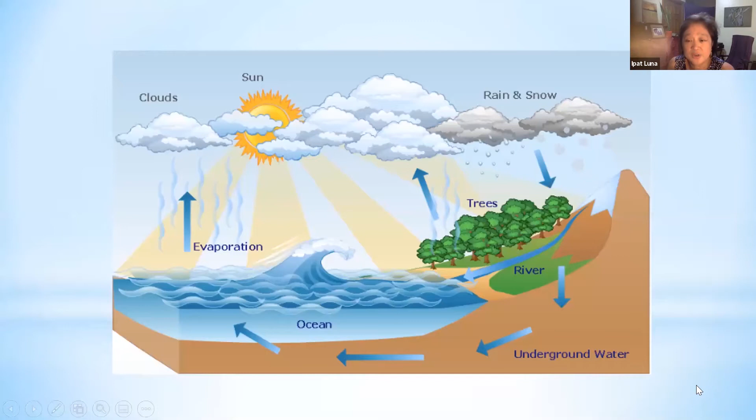I'd like to end by saying that we need to determine who will really fund the infrastructure, because right now we are at a stage where the concessionaires in Metro Manila have their contracts being reviewed, and they haven't heard yet whether their extension will be valid until 2037.

The Supreme Court decisions in the Philippines are clear that this is the concession's responsibility. The Clean Water Act, though, says it's the national government's regular budget, but there's a huge difference as to when this money is spent by whichever party spends it. The longer the delay, the higher the cost, the higher the damage, and the higher the rehabilitation cost as well. It needs to be determined that if the government will be spending it, it needs to be in a specific department. Right now, I haven't met anybody in the DPWH who supports putting this in their budget.

So I think the only way to make all of this water used by Metro Manila and the highly urbanized cities usable again and bring it back to the water cycle is for treatment to happen and for there to be a realization of the value of that water if we make it a resource — the value of treated wastewater. I guess that's it. Thank you very much.

Thank you, Sir Onkoy, for the kind introduction. I'm so happy to be here today to discuss methods for a circular economy, a cause I have been dedicated to for the past 10 years through my invention of BioPipe no-sludge technology. Today I'll be talking about the water supply and sanitation situation in the Philippines, and the BioPipe technology and its application at the Narköy Ecological Hotel in Turkey, where the water is being reused to supply an organic farm.

The Philippines is currently facing a critical point with regards to both the future of the sanitation sector and the levels of groundwater available. Currently, only about 10% of the sewage nationwide is being treated, with the rest being discharged directly to the sea or contaminating underground water supplies through leaking septic tanks or through the dumping of improperly treated sludge. Additionally, because groundwater has become the single greatest source of water supply in the Philippines, supplying 50% of the drinking water and 85% of the piped water supply, it is imperative that we look at both issues and how they affect each other.

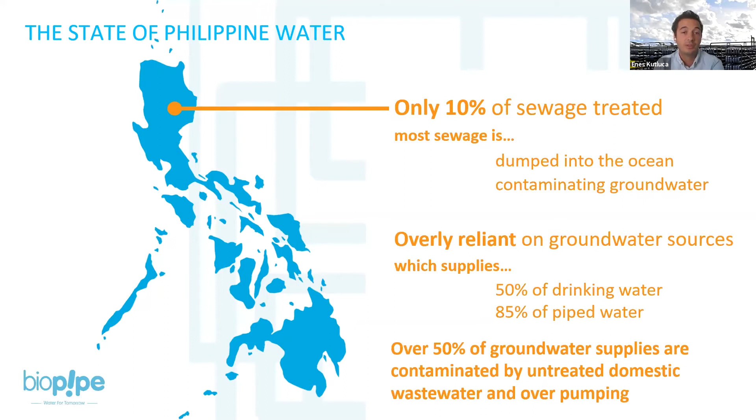And these problems worldwide are why I invented the BioPipe system, which, as you will see in the following slides, helps address both issues of water loss and issues around improper sewage management.

BioPipe headquarters is based in the United States, and we have presence and partnerships in many other countries such as Netherlands, Turkey, United Arab Emirates, Switzerland, Ethiopia, Bangladesh, India, Philippines, and South Africa.

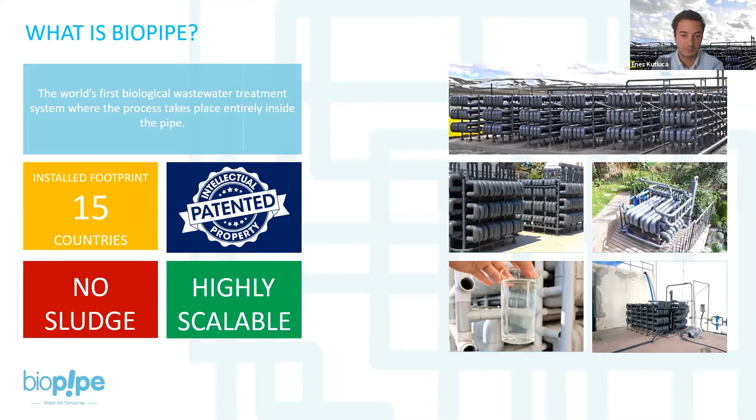As you see in the photos, there are different numbers of modules depending on the size of BioPipe. It's a highly scalable system where you can increase the capacity, just like a Lego kind of attach-and-place system. So where does the technology come from?

The BioPipe process is actually based on biofilm. It's not an activated sludge process. If you look at nature, for example, you will see on a river green layers of biofilm bacteria on the surfaces of stones at the bottom layer of these rivers. These biofilm bacteria keep the rivers always clean, and that happens naturally inside nature without producing any sludge. That's called the biofilm process in nature, and BioPipe mimics the same process inside the pipes, so all the pipes act like small rivers to treat the wastewater without producing any sludge.

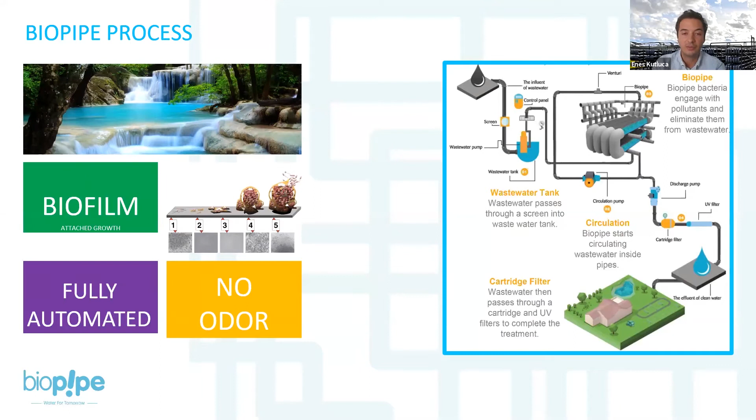The only maintenance part of the system is this cartridge filter, which you need to clean with clean water to remove the disattached biofilm bacteria. So it's a very simple system. It doesn't have many wastewater tanks, many pumps, sludge pumps, etc. It's a very simple system that has only one wastewater tank and a filling pump, circulating pump, and discharge pump. The methodology is very easy - just fill, circulate, and discharge. Thanks to the biofilm process, there is no odor in the system, and it's a fully automated process.

And you don't need to add any chemicals, or check anything on the site. So it's a plug and play, fully automated system. Whereas with other technologies, you may need to add some bacteria or some chemicals to the system.

If you look at the maintenance frequency, because biopipe doesn't have a lot of electronic equipment, it's very easy to control. The only maintenance part of the system is the cartridge filter that you need to clean every 3 months.

Talking about maintenance frequency, if you look at the operation cost - as I said, there is no chemical cost or biological bacteria cost on the system. And because we don't use any blower in the system, the electricity consumption is very low. So the operation cost of the system is very low.

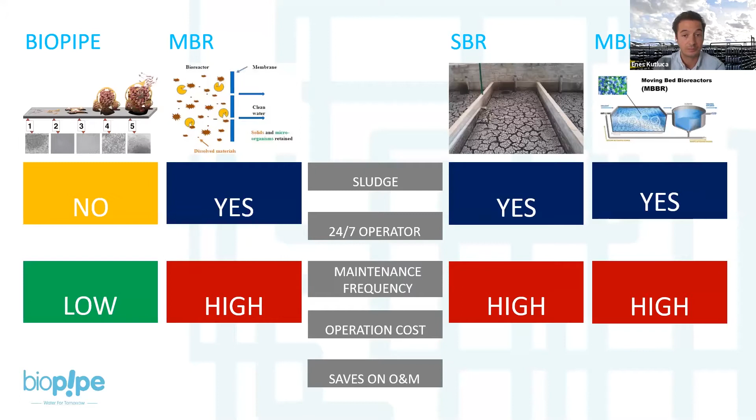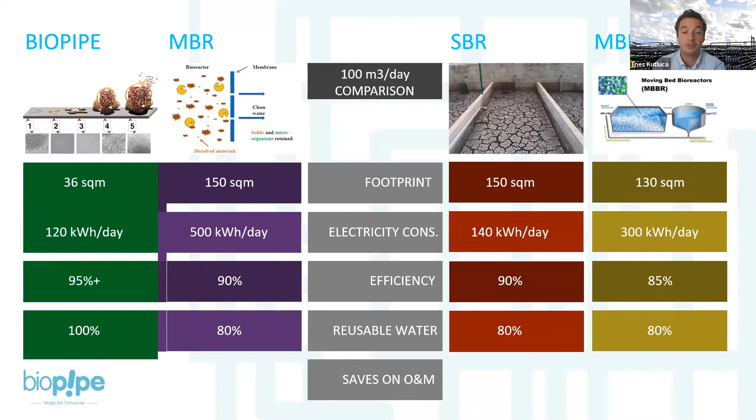For electricity consumption, because we don't have any blower in the system, we are using Venturi's natural air aeration in the system. The electricity consumption is not very high, and compared with other technologies, it is much lower than any other technology. But at the same time, the efficiency of the system is very high in terms of treatment efficiency of BOD, COD, total nitrogen, etc. And because there is no sludge in the system, you get 100% of the water that you supply to the system. This is also very important.

If you look at the water quality, the BOD at the end of the biopipe system is less than 10, COD is less than 50, ammonia is less than 0.5, phosphorus less than 1, total suspended solids is less than 10, and we can talk about an efficiency higher than 95%.

This is thanks to the design of the system that doesn't produce any sludge and that mimics the same methodology found in nature. You can see a photo from Maldives, Hilton Hotel, showing the incoming water and the effluent water on the right side of this slide.

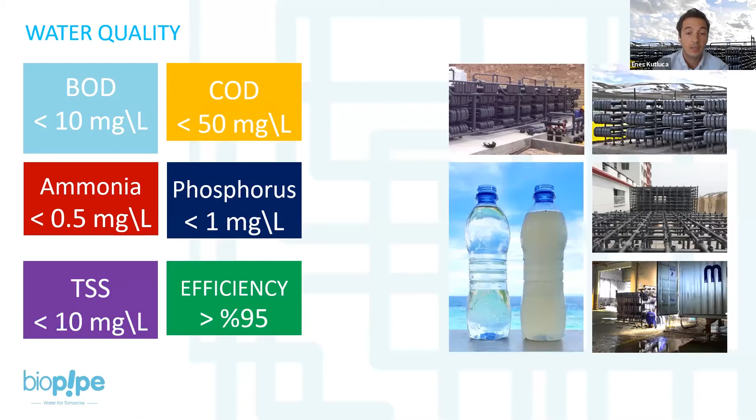If you see the other photos, let me summarize here. You would see different sizes of modules according to the capacity of the system. In some cases, we can also put biopipe inside containers, or place them outside in winter conditions, or outside again in very hot climate conditions. The only thing we need to do is protect it from direct sunlight.

So let's look at a case study in Turkey. That's an ecological hotel, and they are recycling their water, but also all the materials used in this hotel are ecological. In respect to the environment, they started using biopipe.

Before biopipe, they didn't have any sewage network connection. So they had a wastewater tank that needed to be vacuumed every 2 weeks, and that was a very costly process. They wanted to reuse their water for irrigation for their organic farming. So we saved almost more than 7,000 tons of water, which is reused for irrigation. And the payback period is actually less than 2 years - it's not an expensive system.

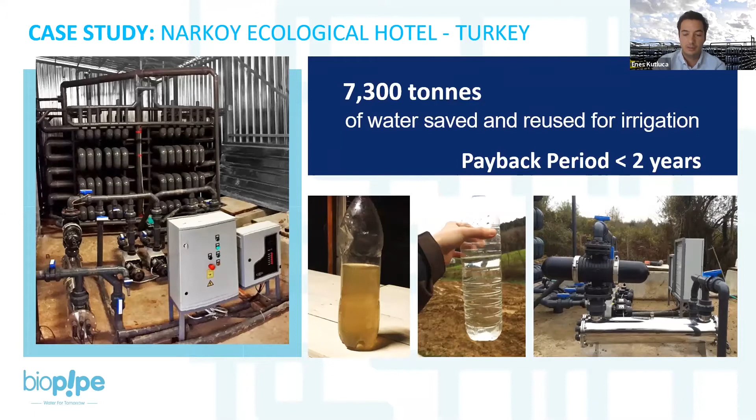If you think that you can treat your wastewater, domestic wastewater, and reuse it for organic farming.

So here we have different photos for different projects. What I want to emphasize here is that biopipe is suitable to put on the rooftops or sometimes in the basements. You would see different photos where sometimes a hotel might say that there is no space to put biopipe, but then we can build a structure on top of a road and put biopipe there, or we can put it on the rooftop. Or even sometimes through a single door, we can install the biopipe inside the basements. So this is also amazing. And if you compare with other technologies on the market, it's unbelievable that we can fit biopipe and design it for different needs.

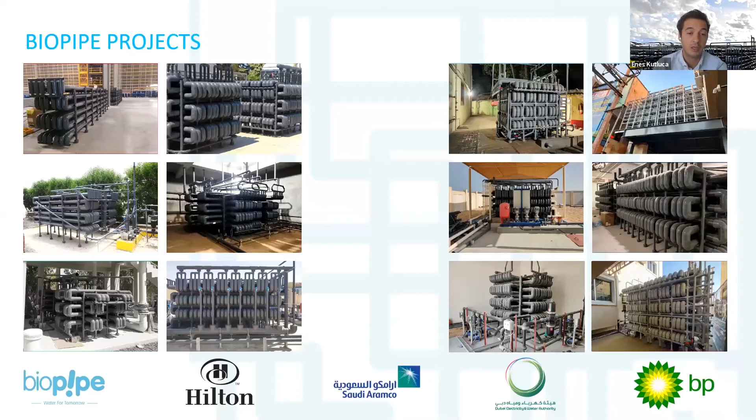That's all with my presentation. Thanks for listening.

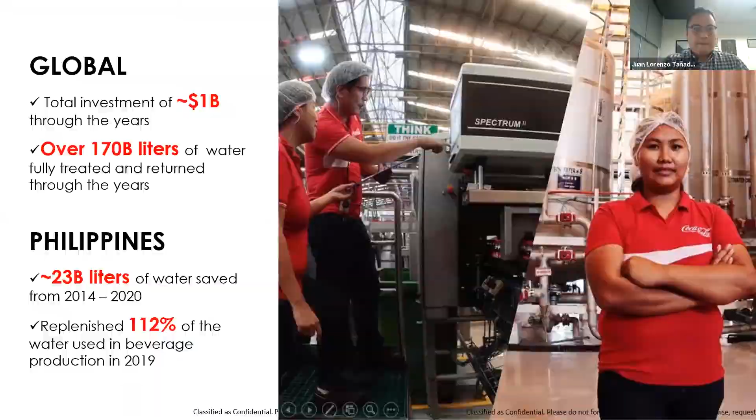This is an example of our plant in Canlubang using a wastewater treatment facility—this technology is quite familiar to everyone. At the end of this process, though, we're very proud to say that the water that comes out is enough to support aquatic life. So in our plants, particularly our showcase plants, we have a fish pond, sometimes a koi pond, that evidences the ability of the water we treat to support aquatic life.

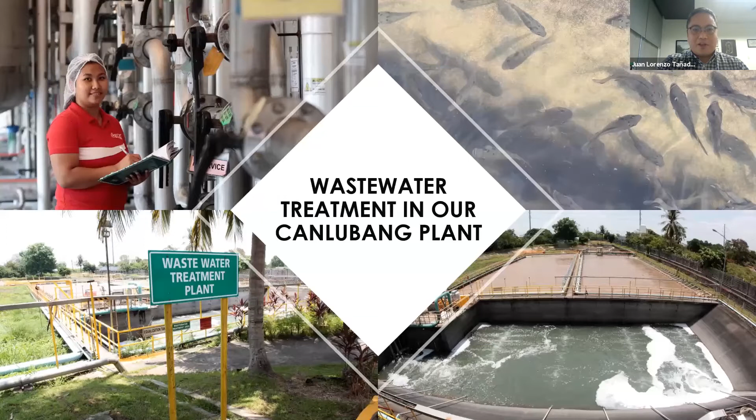So this is the Canlubang plant. A quick stat: the Canlubang plant has the fastest bottling line of Coca-Cola in the world. It can produce about 81,000 bottles of Coca-Cola per hour. So that's here in the Philippines.

Anyway, here's our water efficiency ratio. You'll see that from 2014 to 2019, we were able to effect a 31% decrease in our absolute water consumption. We did this by implementing our top 20 water savings initiatives—right washing at the right time, smart design for optimal bottle washing, and small steps that bring big gains. Since 2014, more than 20.4 billion liters of wastewater has been recovered, treated, and returned. As a company, we're quite proud of that, as you can imagine.

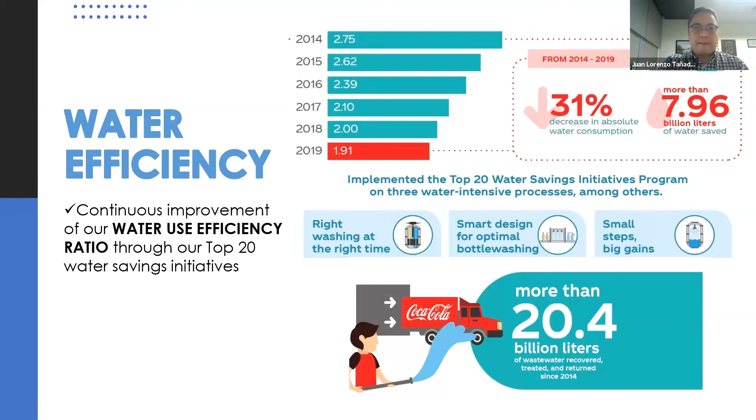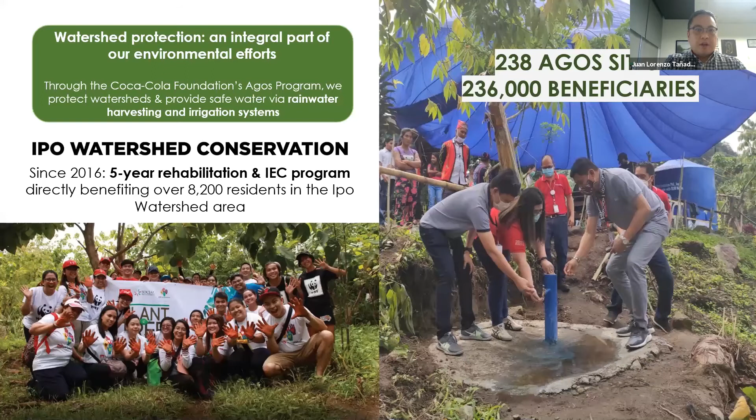As mentioned earlier, because of our corporate social responsibility efforts, we also look forward to watershed protection as part of our environmental efforts. We are a sponsor of the Ipo Watershed Conservation Project. Since 2016, we've done a rehabilitation and information and education campaign directly benefiting over 8,200 residents in the Ipo watershed area here in Bulacan. We also have the AGOS sites where over 236,000 beneficiaries now have access to fresh, clean, potable water.

If you can see some of the indigenous people in the background, it was actually their first time having access to clean water in the communities they lived, whereas before they had to walk kilometers to get water and carry it on their backs in pails. Because of the long trek, they would lose a lot of water on the way up, so projects like these come as a big relief to them. I've been to a couple of these turnovers, and it was very touching to see the reaction of the people who were ultimately benefiting from these projects.

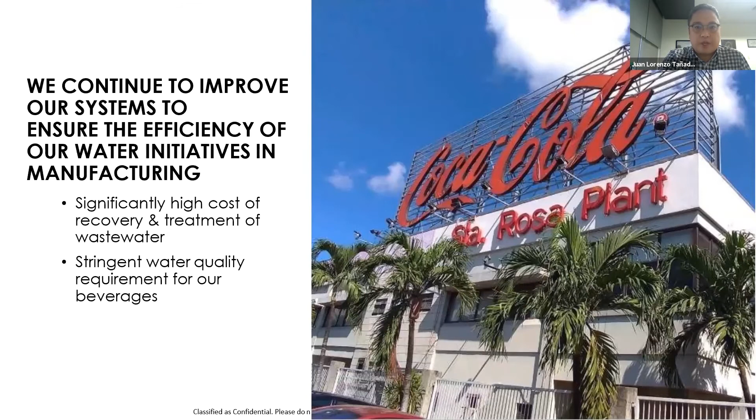We often determine, based on water quality, the use that the water we have treated will be put to. For example, we could use the water we have recovered for other purposes, such as our toilet facilities and bathrooms, perhaps for cleaning and so forth. But definitely not a single drop of water does or should go to waste in our manufacturing operations.

So after COVID, during COVID, even as we look towards the new normal, we remain committed to strengthening our sustainable operational system. We will strive to improve our wastewater treatment practices further. We're open to discussing this with our stakeholders, with government, our private sector partners, to ensure that as we continue to operate in the Philippines, Coca-Cola Beverages Philippines Inc. is and will continue to be perceived as a responsible partner.

And I think that should be it for this particular presentation. Thank you everyone for your time and for listening. Maraming salamat po.

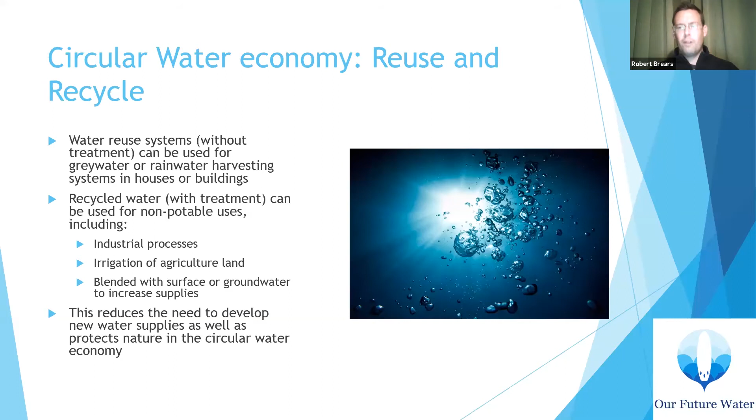So next slide, thank you. This is just a very broad look at what's going on out there in the world - some of the most exciting projects that are out there today, and best practices that can be taken away. They can be implemented in any country, any context.

So the first one here, we have the Hamburg Water Cycle. Hamburg Wasser in Germany is creating a residential development with 2,000 residents on 35 acres. What the Hamburg Water Cycle is doing is inside the houses itself, black water is separated from grey water. They actually have vacuum toilets that use almost no water.

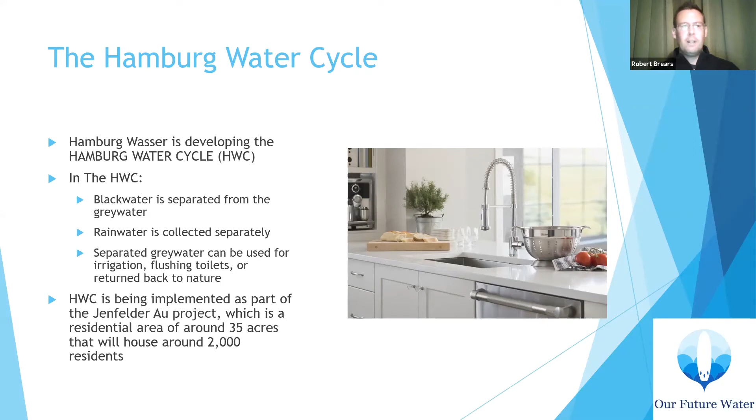So the black water is highly concentrated, easy to process, and with lower energy costs. The rainwater is collected separately, and grey water is also collected separately for flushing toilets and putting water back to nature itself. This is part of a wider Jenfelder Au project, on a former military barracks in Hamburg. It's about creating a new housing development, but also implementing 21st century solutions instead of just status quo, same old same old. This was about creating a water cycle of the future as a demonstration project that inspires people in Hamburg, the wider region in Germany and Europe, or anywhere in the world - this is possible.

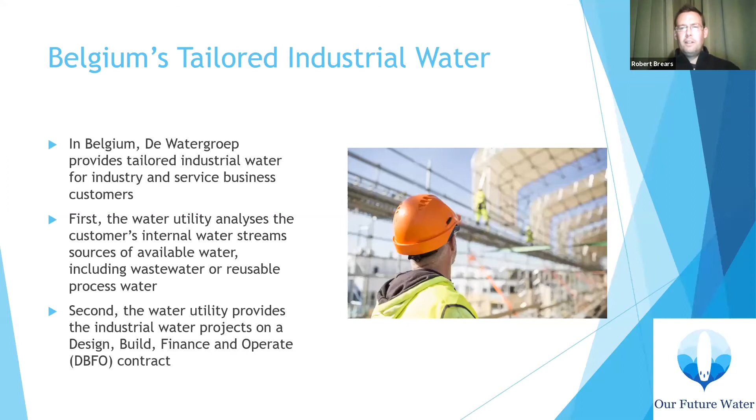And then instead of telling the client, sure, here's some grant funding or whatever, go and build it, it's not our problem - actually they sit down, and on a design, build, finance, operate contract, the water utility itself will actually build the system for the client as well. So that's kind of like a win-win, I guess it's a public-private partnership. And that's another type of solution that's available out there.

And the next one, please. Similar to Belgium's fit-for-purpose tailored industrial water, what the Queensland Urban Utilities have done is they've created a fit-for-purpose recycling program that offers different classes of water, different qualities of recycled water. So basically, if you want high-quality recycled water, you pay more for it. If you want low-quality recycled water, you pay less for it. Very simple - it's based on a per kilolitre charge, with the price increasing with quality.

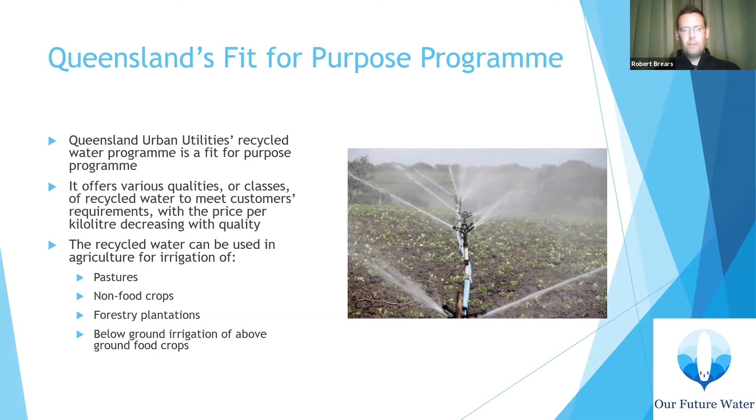And obviously it can't be used for drinking water, and it can only be used for non-food crops, forestry plantations, below ground irrigation of above ground food crops. But I think this is quite a neat way to show how you can create different revenue streams for a utility. How can you promote water scarcity awareness, how can you factor in high energy costs - you charge more for it. The people want it, they pay for it.

Next slide. And then we talk about, of course, the neighbours, Singapore. What they've got is NEWater. It treats used water into ultra clean, high grade reclaimed water, for use in industrial aircon cooling purposes and wafer fabrication plants. And one of the things is it's delivered on tap.

They have gone and created underground systems, deep tunnel systems that transport all this water around the city. Also, interesting enough, during dry periods, the NEWater can actually be blended with raw water in the reservoirs to supplement the supplies. And then obviously it goes through its treatment processes, goes to wastewater treatment, and eventually goes through all the different treatment processes to finally become potable water for the consumers.

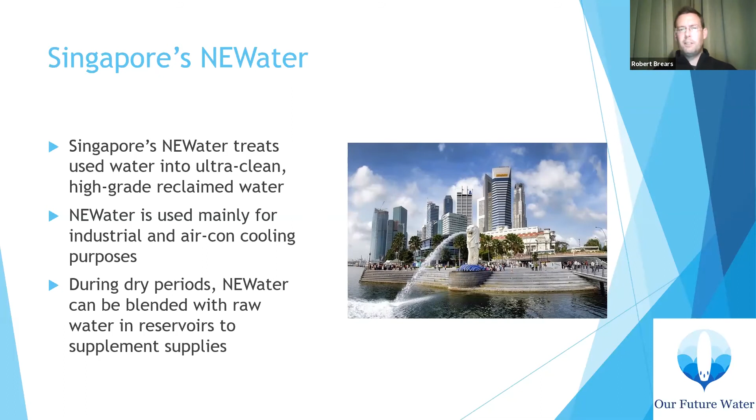And that's only done in an emergency situation. Now it's interesting because this water is actually meant to be making up about 60% of the demand for industrial water in the next coming decades.

So basically, what I'm coming in to say here, in this very short, snappy trip around the world, is what is possible, what is out there. And I suppose what I'm really saying is that rather than implementing 20th century old technologies, a lot of countries have a chance to just leapfrog technologies and implement systems, moving forward, even going higher than before. When you've got something to start from scratch, you can implement anything you want. When you've got old legacy systems, it's very hard to retrofit these things.

So my hope for today is that people will take this away and think, wow, this is what's going on in this country, this is going on in that country. Let's try to implement this at home, or even export it to another regional location. On that note, feel free to connect with me on LinkedIn or join my group, Our Future Water, and continue the discussion. Thank you so much for hosting me.